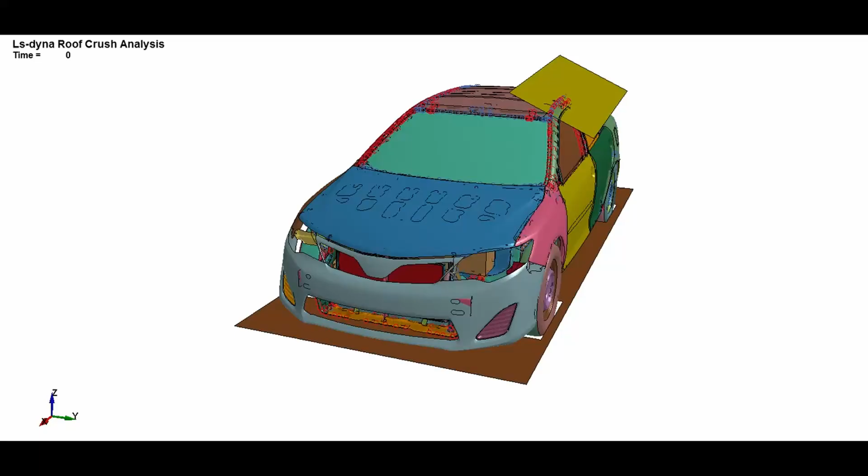The title is Evaluation of Impactor Speed and Angle Mode in Radioss Roof Resistant Test.

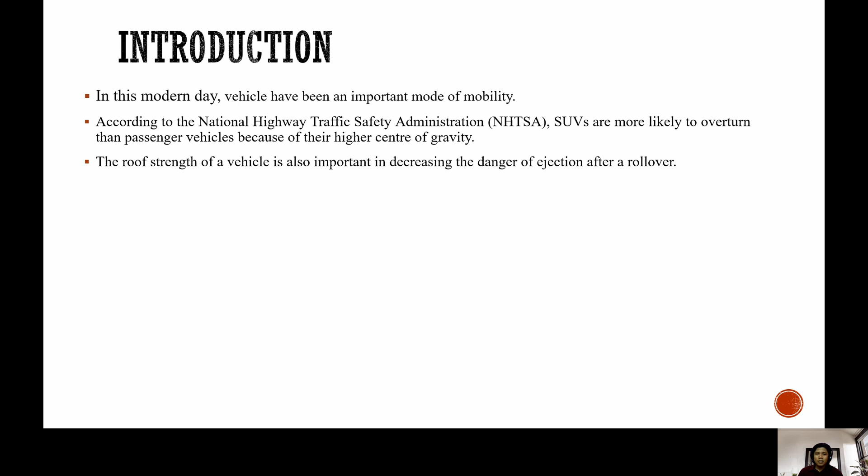For introduction, in this modern day, vehicles have been an important mode of mobility. According to the National Highway Traffic Safety Administration (NHTSA), SUVs are more likely to overturn than passenger vehicles because of their higher center of gravity. The roof strength of a vehicle is also important in decreasing the danger of ejection after a rollover.

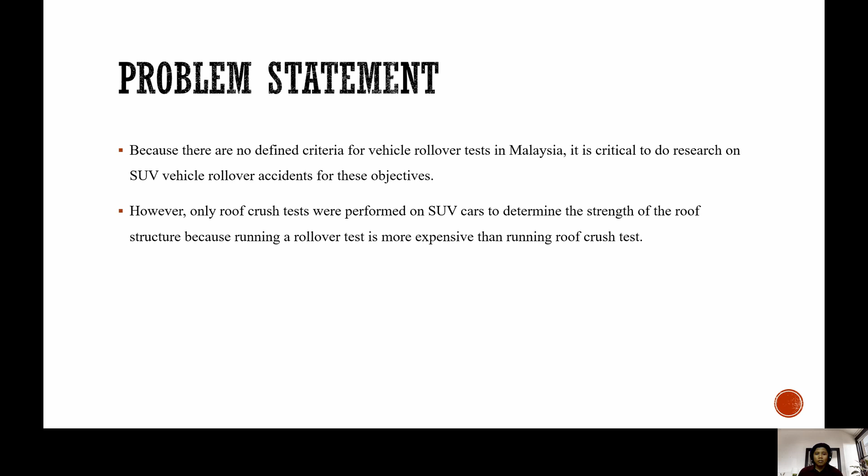Next is problem statement. Because there are no defined criteria for vehicle rollover test in Malaysia, it is critical to do research on SUV vehicle rollover accidents for this objective. However, only roof crush tests were performed on SUV cars to determine the strength of the roof structure, because running a rollover test is more expensive than running a roof crush test.

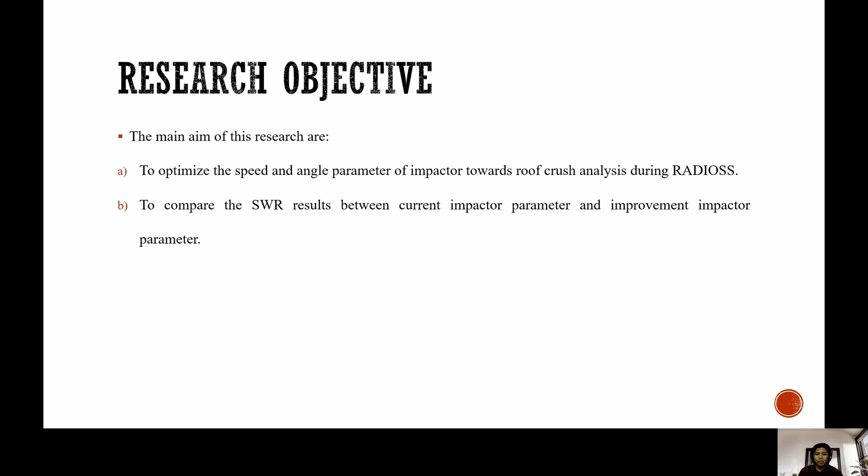For research objective, it has two. The first one is to optimize the speed and angle parameter of impactor towards roof crush analysis during Radioss. Second is to compare the SWR results between current impactor parameter and improvement impactor parameter.

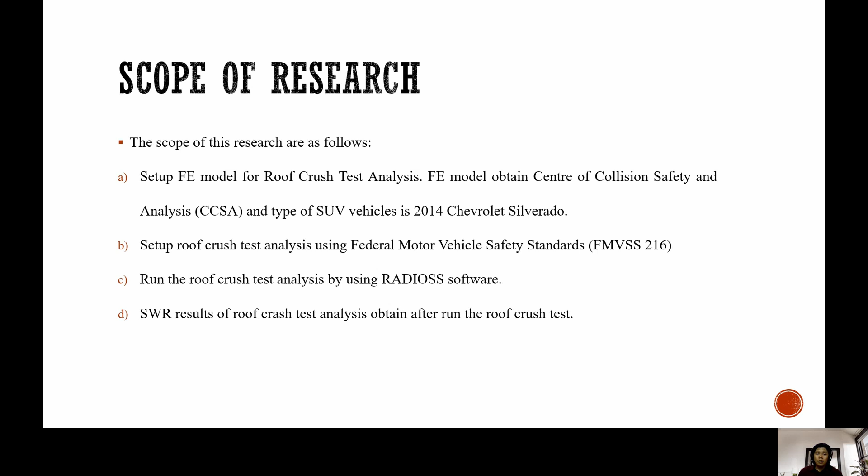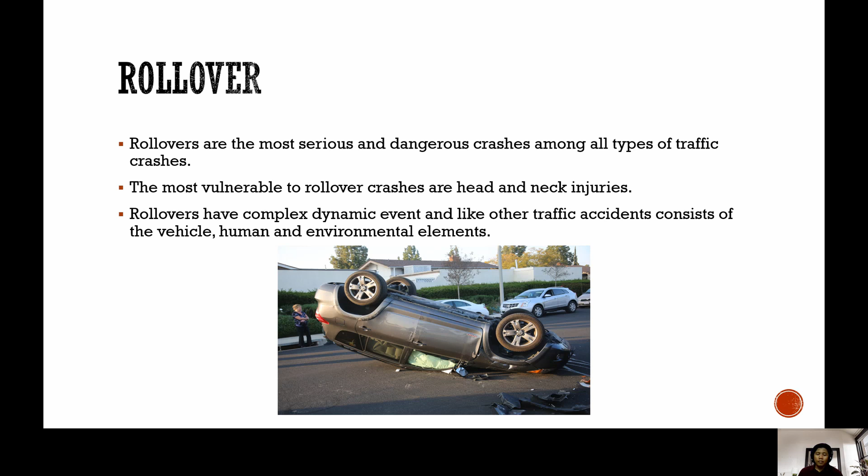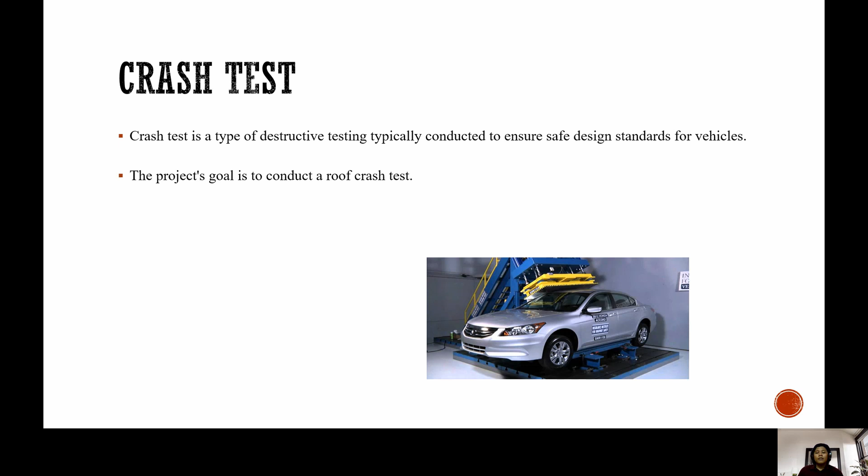For crash test, it is a type of destructive testing typically conducted to ensure safe design standards for vehicles. The project's goal is to conduct a roof crash test.

For roof strength crash test, the roof strength is determined by sliding an inclined metal plate down on one side of the roof at a slow but constant speed, and measuring the force required to crush the roof. The force exerted proportional to the weight of the vehicle is known as the strength to weight ratio, or SWR. A good strength to weight ratio is at least 4.

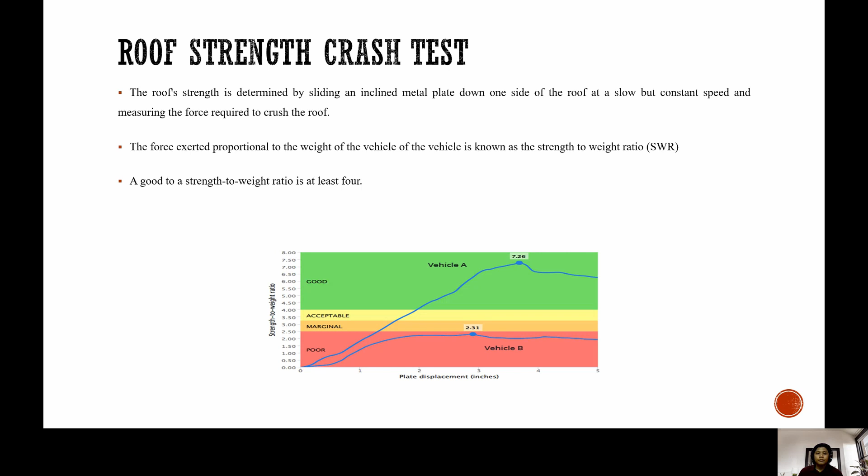And then by the quasi-static and dynamic roof crush: the definition of quasi-static is the load is applied so slowly that the structure deforms also very slowly, and therefore the inertial force is very small and can be ignored. Dynamic load causes a structure to vibrate and the inertial force is big enough and must be considered. Impact involves a load quickly applied over a short time duration.

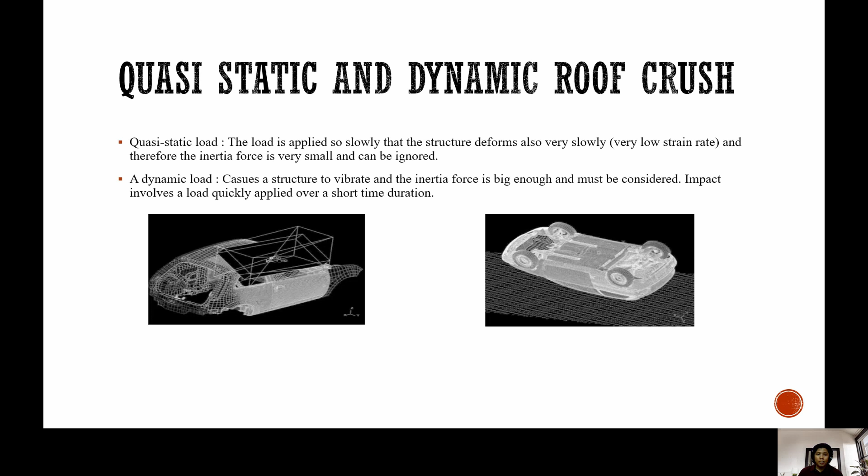This is for standard input parameters while running the roof crash test. It has 9 input parameters. The first one is roll rate, second is pitch rate, yaw rate, roll angle, pitch angle, yaw angle, x velocity, y velocity, and lastly z velocity.

Two values were chosen to define the distribution of the vehicle kinetic energy, which has three parameters: roll rate, x velocity, and z velocity.

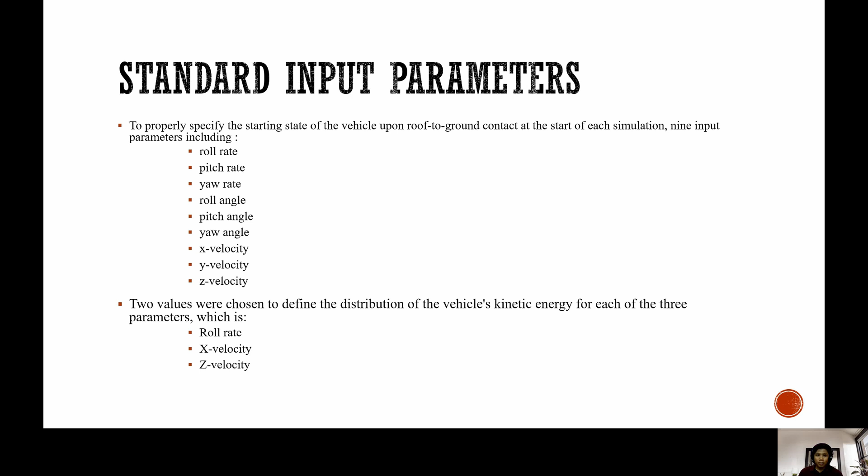So for the methodology, the strength to weight ratio SWR of the roof test is the main goal that needs to be achieved. The methods used in achieving the SWR will lead to a different result. The design process is a trial and error method which depends on the selection of parameter of the original model.

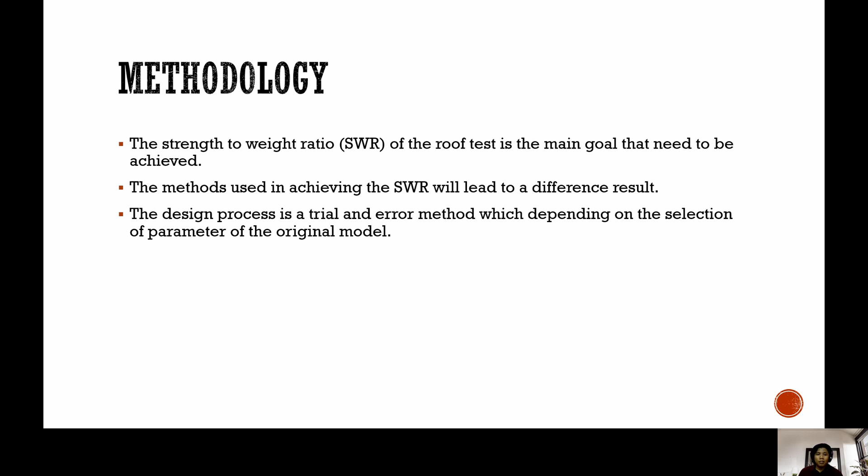So this is the model selection that I ran during my bachelor degree project 1. The model of Chevrolet Silverado 2014 has been chosen as the original model for the crashing analysis by using Altair Radioss. The main reason for choosing this model is that structural and driving component details are included.

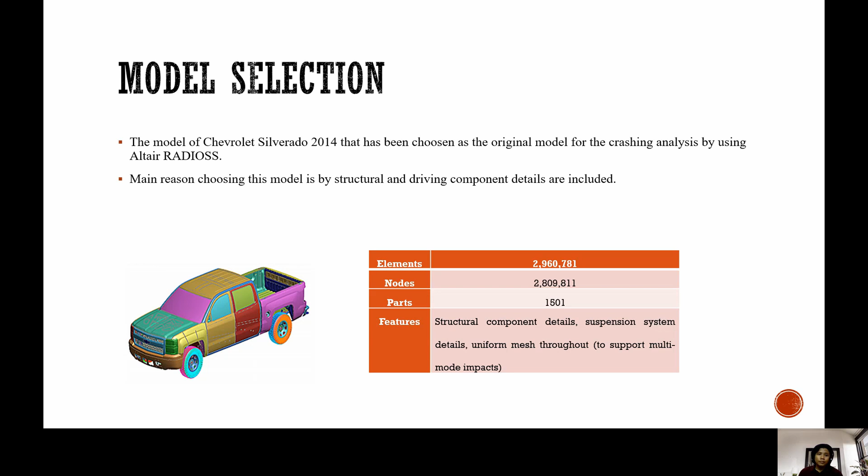So for the parameter considered for roof crush simulation, it has two. The first one is the roll angle mode of impactor, which is 25 degrees, and initial speed of impactor is 200 millimeters per second. The initial roll angle is 25 degrees, pitch angle 5 degrees, and 200 millimeters per second road speed for the Chevrolet Silverado. This is intended to reduce death and injuries resulting from the crushing of the roof into the passenger compartment.

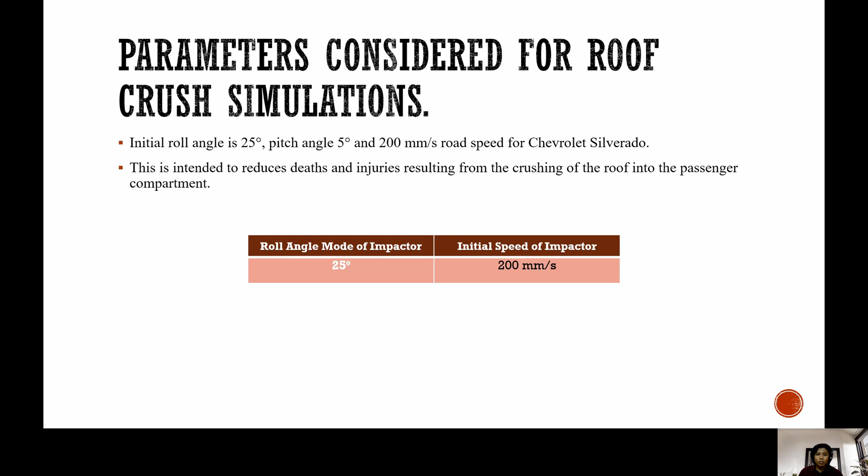For the strength of weight ratio SWR, it signifies how effectively the structure of a vehicle roof can withstand its own weight in the event of a vehicle rollover. As we can see in the table, there is a characteristic on how to evaluate the strength of weight ratio.

If the value is greater than or equal to 4.0, the rating will be great. If the value is greater than or equal to 3.25, or less than 4.0, the rating is acceptable. If the value is greater than or equal to 2.50 and less than 3.25, the rating is marginal. And less than 2.50, the rating is poor.

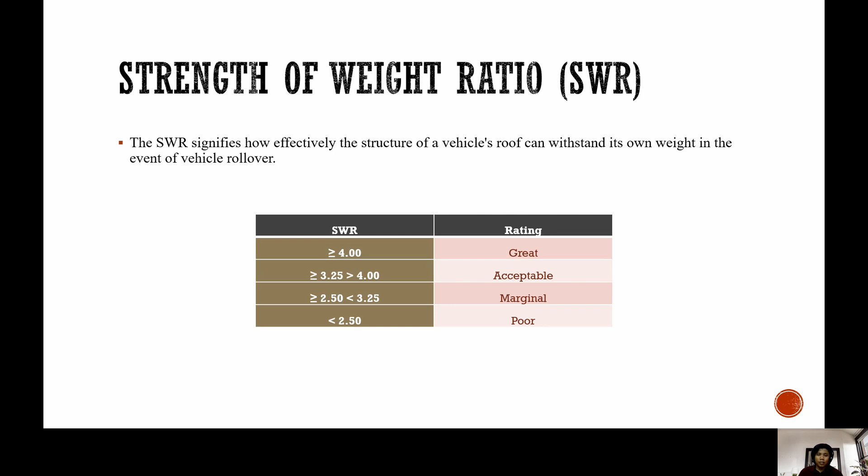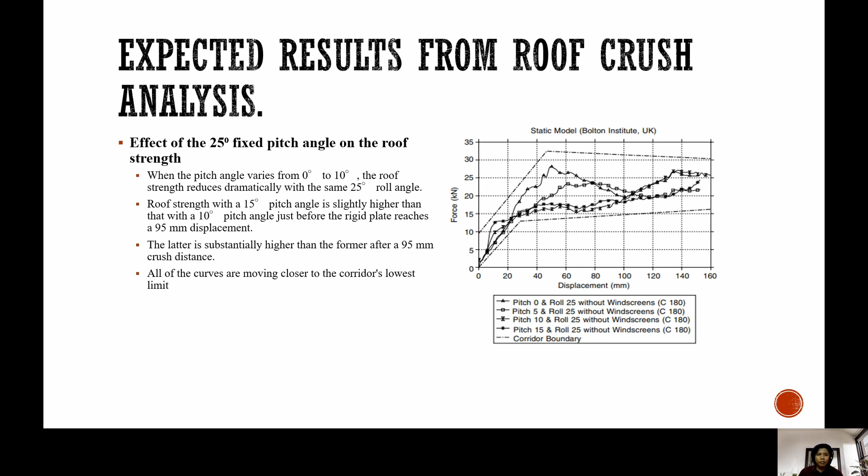So this is the effect of the 25-degree fixed pitch angle on the roof strength. As we can see, when the pitch angle varies from 0 degree to 10 degree, the roof strength reduces dramatically with the same 25-degree roll angle. Roof strength with a 15-degree pitch angle is slightly higher than that with a 10-degree pitch angle just before the rigid plate reaches a 95 mm displacement. The latter is substantially higher than the former after a 95 mm crush distance. All of the curves are moving closer to the corridor's lowest limit.

Okay, so this is the effect of the 25-degree fixed pitch angle on the roof strength. When using the same 25-degree roll angle, the resistance force characteristic remains consistent for roll angles of 10 degree to 20 degree. For a pitch angle of 5 degree, the force history curves of the two-sided roof diverge slightly from each other. At a pitch angle of 5 degree, the highest amplitude of roof strength loss on the near and far sides are

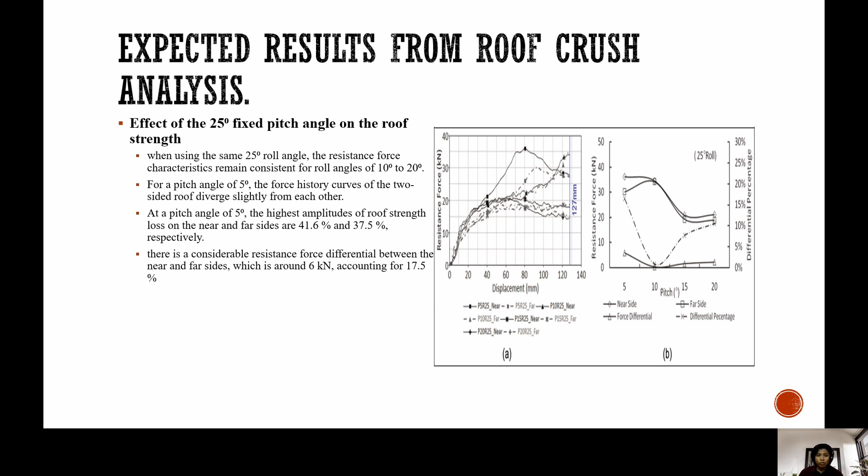41.6% and 37.5% respectively. There is a considerable resistance force differential between the near and far side, which is around 6 kN, accounting for 17.5%.

So after the effect of roll angle, this is the graph for force displacement. As we can see, the peak in the graph which occurs when the impactor hits the car is the highest peak.

Okay, for the vehicle to pass the roof crush test, it has to have the capability to withstand load equal to 3 times its own weight. As per standard of FMVSS 216, the roof of the model should resist 3 times the force acting on the stationary model at rest, which is 47,000 Newton equal to 3 times GVW. GVW stands for gross vehicle weight. It is a product of the unloaded weight of the vehicle and acceleration due to gravity. Resistive force must not exceed 47,000 Newton.

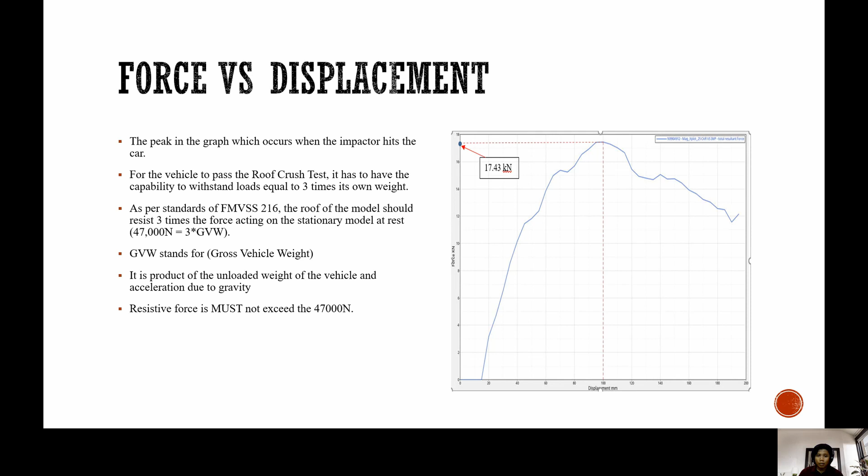So how to calculate the force versus displacement? From the graph, resistive force is 17.43 kilonewton from the high peak. Okay, so we convert to Newton, which will become 17,430 Newton. Gross weight of the vehicle equals vehicle mass times acceleration due to gravity. So the calculation will be 175 times 9.81 equal to 1716.75 Newton. Strength to weight ratio is equal to resistive force over GVW, gross vehicle weight.

So to calculate it, SWR equal to 17,430 divided by 1716.75 equal to 10.2. The strength to weight ratio is 10.2 due to BIW gross weight of car. BIW is body in white.

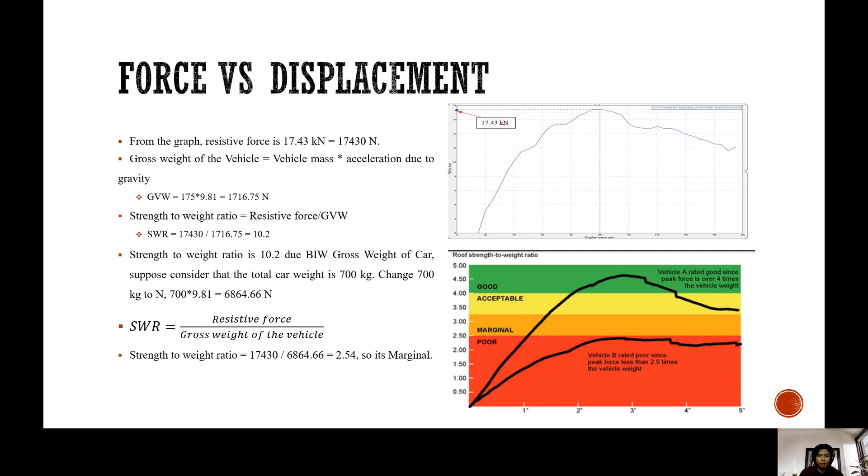Suppose consider that the total car weight is 700 kg. Change 700 kg to Newton, which is 700 times 9.81, so it will be 6,864.66 Newton. So by the formula, SWR equal to resistive force over gross weight of the vehicle. So the strength to weight ratio we get is 2.54. So it will be marginal on the graph.